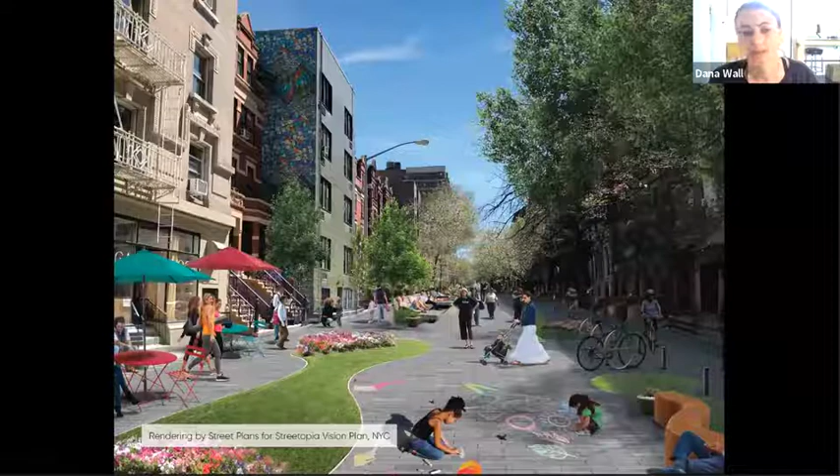So I like to start out just with a quick overview of tactical urbanism. As planners and designers, typically we'll take something like this and we will create on a computer something like this. But often the hard part is getting from something like this to this. And typically the capital process and city process is to basically jump from those designs to a permanent project. And the quick build methodology is all about breaking down that process into smaller, more temporary increments that you can then iterate upon and improve the design and improve the project until you arrive at the permanent project.

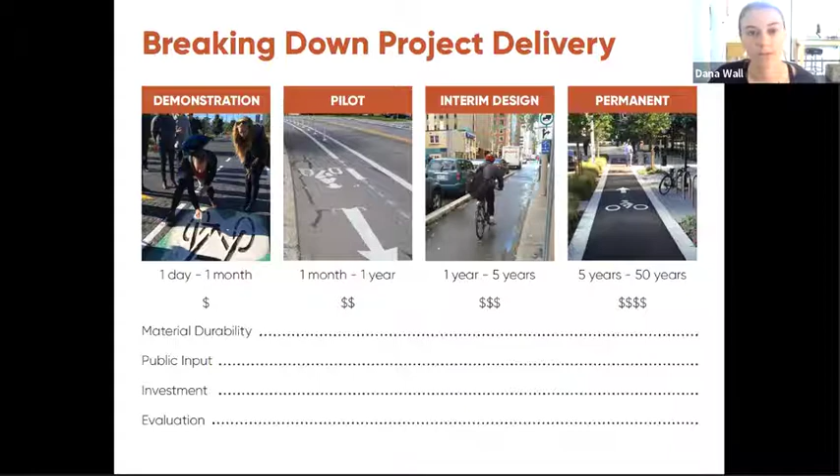So the goal is to have a permanent project that has already been tested, evaluated, and vetted before potentially millions of dollars are invested in that infrastructure. So the idea is that you build a project, you learn from it and evaluate, potentially make tweaks as necessary, and you just kind of continue that process until you get to the permanent version.

So this is the definition that we like to use for tactical urbanism, or the quick build methodology. It is an approach to neighborhood building that uses short-term, relatively low cost and scalable interventions to catalyze long-term change. And that's really the key piece that we're talking about here: how do we use it to get to those lasting impacts and potentially influence those permanent projects.

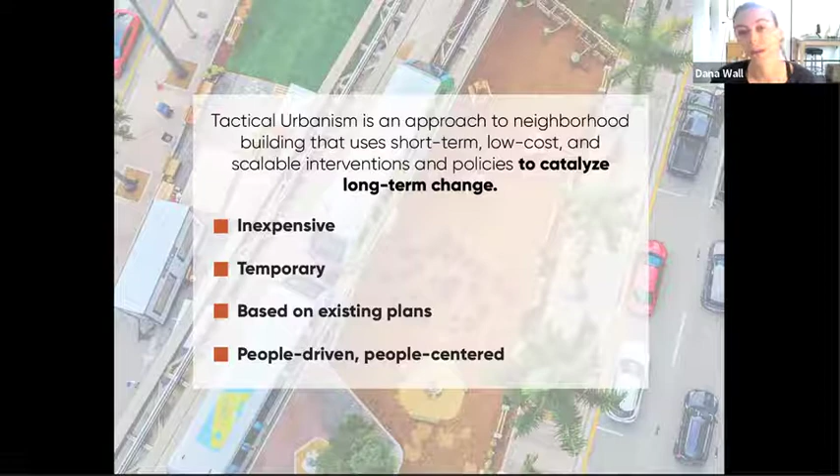So it is less expensive than capital projects. Tactical urbanism projects are temporary, although that can mean anything from a weekend to 3 to 5 years. Often they are based on existing plans and existing goals that cities have for active transportation. And then they are also people-driven and people-centered. So we use a lot of volunteers in our projects, and that is typically a part of the public engagement of our master planning projects.

So I'm going to go over 3 case studies of projects that we have done, and each one is going to have a little bit different of a takeaway in terms of lasting impact. And then I'm going to conclude with some key takeaways about how sometimes the lasting impact is not necessarily getting to that permanent project immediately, but there are plenty of other benefits and lasting impacts from doing these projects. So I'm going to share a couple of examples.

This first one is a project that we did in 2018 in Asheville, North Carolina. High level description is it was a 1-lane elimination project in each direction. The city was working on a redesign for this 1/3 of a mile corridor adjacent to downtown Asheville. And they wanted to add enhanced bicycle infrastructure and sidewalk extensions. And so we were hired, and we did several public workshops to go over the design alternatives. And what ended up being the project was sidewalk extensions, basically a shared mobility lane.

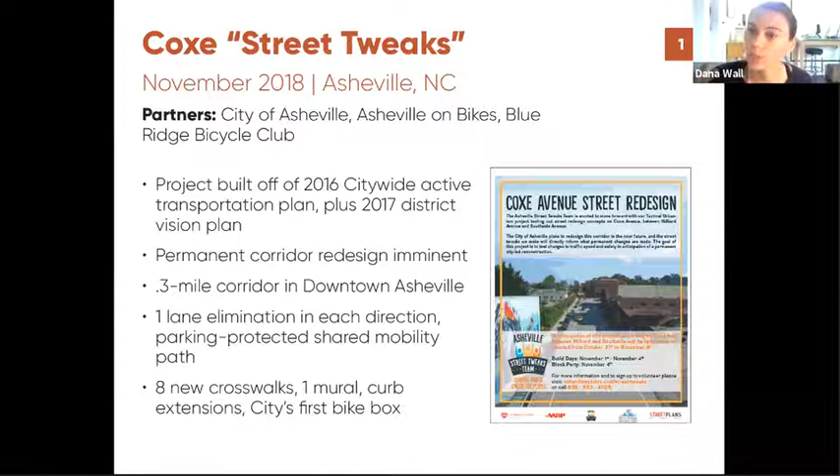So that was a sidewalk extension, which included a bike lane, as well as space for people to rollerblade, scooter, and walk. So these are just some sort of in-progress photos. The project did include a mural there in the center block of the corridor. The project also included 8 new crosswalks. We worked with the city to install all of the necessary signage and other things around those crosswalks.

We had 2 types of physical protection along the shared mobility lane, which included large planters, as well as these low-profile delineators. And this is what it looked like after. So you see here, this is the shared mobility part there, primarily the beige piece adjacent to the curb side. And we just basically popped out the on-street parking that was there. So we took a lane in each direction and really tightened up this roadway a bit.

This is just an image of the mural that we did in the middle of the street. We worked with a local artist. She actually designed it. And then we also worked with a local maker who helped us with the stencils. I think it ended up being over 20 different stencil pieces that we used to implement this mural. Just another couple of photos. Signage is always included. A couple of close-ups of one of the crosswalks there. And we also did a bike box; Asheville's first bike box was a part of this project.

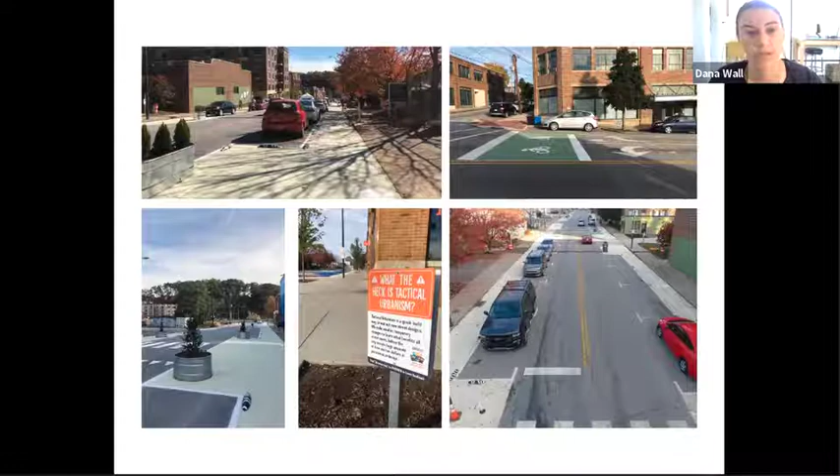So these are just some snippets from the final report for the project. A couple of the major successes and takeaways from the 6-month demonstration or pilot project was that it really reduced speeding. So the highest speed before the project was almost 90 miles per hour. That was kind of the absolute highest that a car had ever been recorded on that corridor. And then after the project, those high speeds were substantially reduced. And also very important, the car traffic throughput was unchanged. So the project itself did not cause any more congestion. The average daily traffic did not change.

And, of course, with reduced speeding, we also see lower risk of pedestrian fatality. That was also a very important takeaway. And then we also had a company do a more placemaking analysis. It's a little complex to go into in this presentation, but essentially, they concluded that the project made the corridor a little bit more pleasant for people to not only pass through, but reside on as well.

So about 2 years later, the center mural was removed. As you can see, the project has faded pretty substantially in 2 years. The city's design process for this corridor has been basically put on hold because of the pandemic. So there aren't any immediate actions that are going to be taken in terms of the permanent project. However, the project is taking on a new role helping to facilitate social distancing and outdoor dining and all of those interim changes that cities are making to accommodate safety during the pandemic.

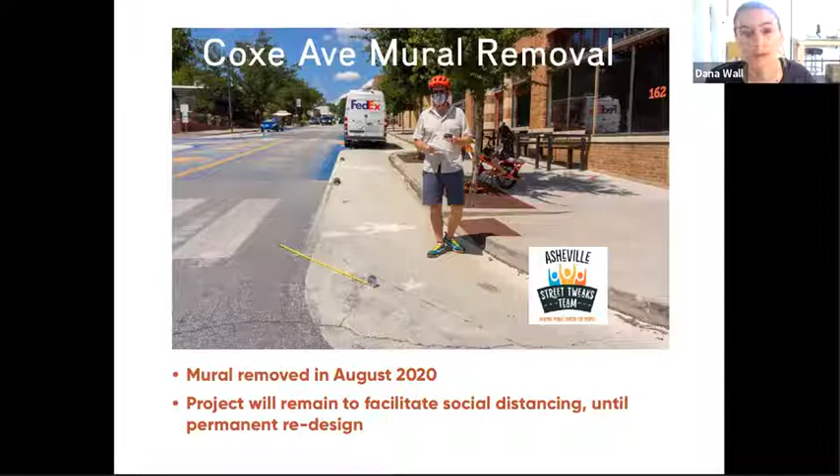Second case study is some of our work in Jersey City. So we both primed the bicycle master plan recently, and we also supported public engagement for the pedestrian enhancement plan. Both of these efforts were around 2018, 2019. And in both of these efforts, we were in charge of including temporary demonstration projects as a part of public engagement, and also to vet some of the initial proposals that we were making for the bikeway network and for intersection improvements for the pedestrian enhancement plan.

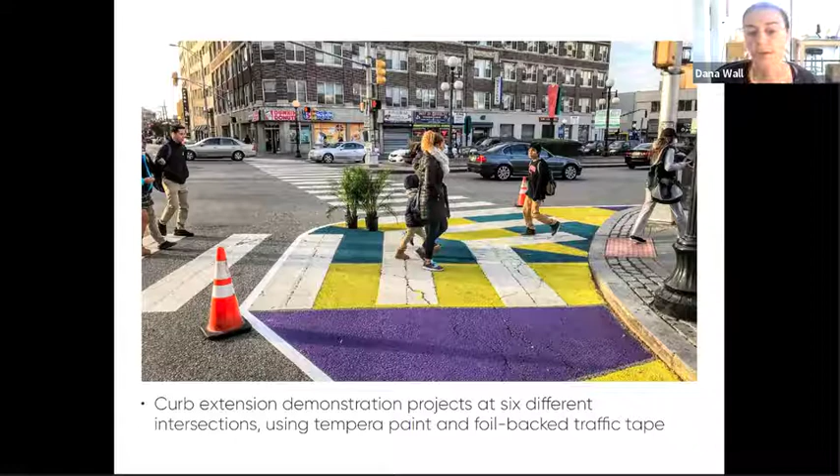So these are the demonstration projects. This is just one example. We did them at 6 intersections throughout Jersey City as a part of the public engagement for the pedestrian enhancement plan. They were exceptionally temporary, much more temporary than the first case study I went through, which was more of a 6-month pilot project evaluation period. These were made with tempera paint, so they pretty much washed away with the first rain. And we used very temporary foil-backed traffic tape for these as well.

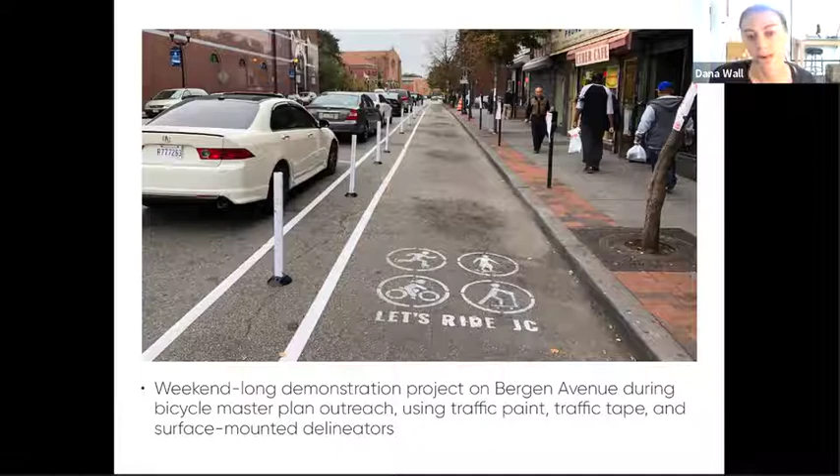And this was the demonstration project that we did that was a part of the bicycle master plan. This is on Bergen Avenue, so it's one of the corridors that we were really heavily looking at for the plan. And similar to the curb extensions, this was just done over a weekend. We used all very temporary materials to demonstrate this as a part of the public engagement.

And so Jersey City, we always say, is kind of like an all-star city in terms of taking things from temporary to permanent. They are an incredibly unique city in the sense that they really have taken the methodology and run with it. They have done some incredible implementation since our temporary projects and even before the final bicycle master plan was published. So, immediately following the pedestrian enhancement plan, they did implement 50 interim design curb extensions in the summer following the draft plan, including at the locations that were tested by the projects.

And then similarly, even before the bike master plan was published, they actually managed to implement 5 miles of interim design protected bike lanes. And they have retained us to continue to help them with the interim design and consulting services specifically for bicycle facilities that were proposed in the master plan.

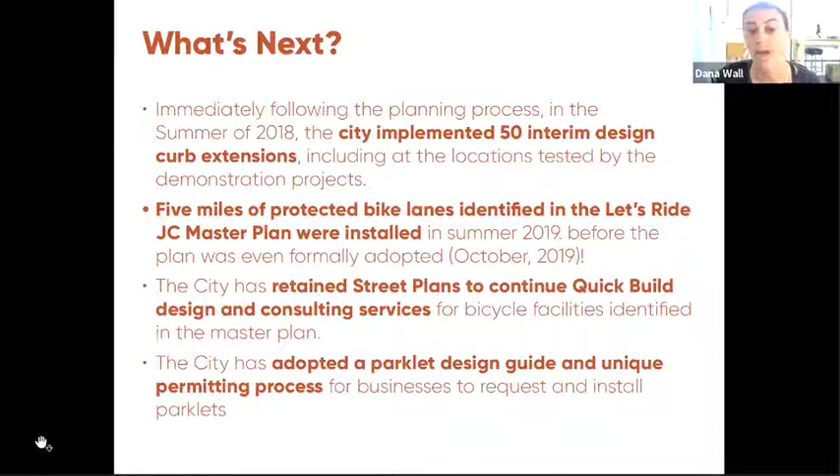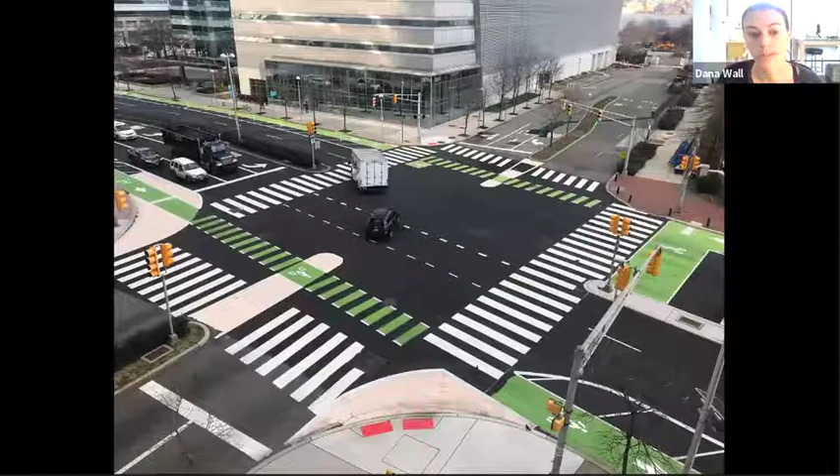So the final case study that I'll go over is the Go Ojai pilot project in Ojai, California. This is a more recent project that we did. It's actually still in the ground, so it's still being evaluated. Similar to the first case study, this is a lane reduction, one lane reduction in each direction to make space for parking protected and separated bicycle facilities, as well as curb extensions.

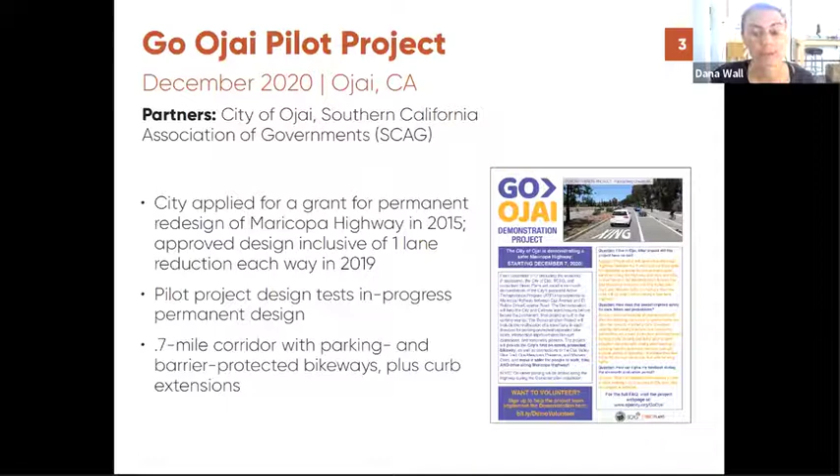So the city had been working on this corridor for a long time, basically since 2015, and they decided that one of the ways to help them arrive at the permanent design would be to do something on a temporary basis. So we were hired to do a 6-month temporary project along this roughly 3/4 of a mile corridor. And something interesting to note about this corridor is that it is actually a highway. So if anyone has any questions about doing pilot projects on highways, feel free to let me know.

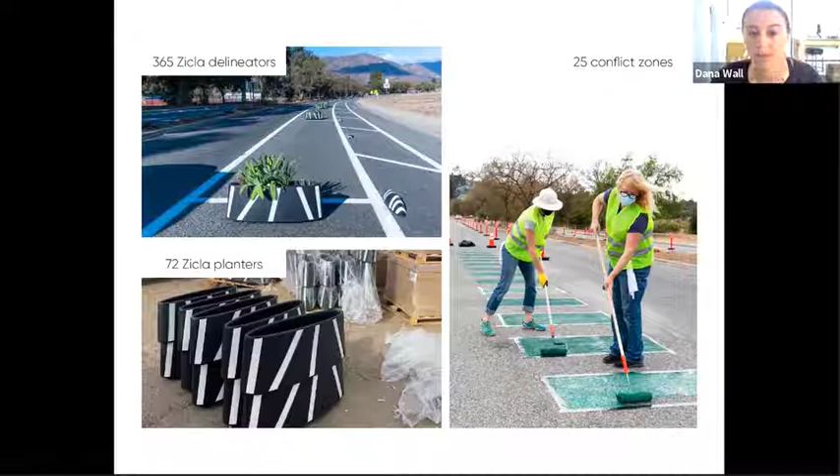It's a little bit more complex of a permitting process, but these are just some images of what the final project looked like. We again used some of those low profile delineators from Zicla. We also tried out one of their newer products. Zicla is a Spanish manufacturer, by the way, and we use a lot of their products in our quick build projects. So we also used planters. And then of course we had volunteers help us with some aspects of the build. We actually had to use contractors this time to comply with Caltrans permitting, but we were still able to integrate volunteers into the process.

We have had issues with planters being hit, as well as some minimal compliance with some of the other aspects of the project. But a really big win from this project is that the city is actually going to be extending it to overlap with full in-person session for school again, and just to continue to get some more evaluation and have the community get a little bit more used to it.

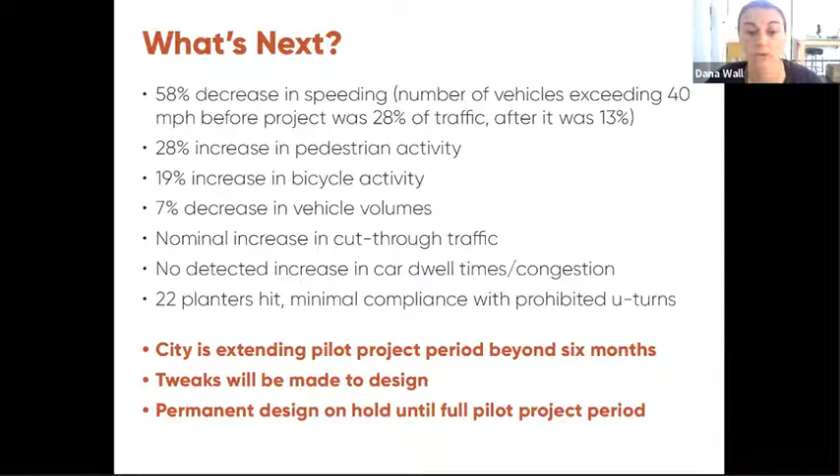So a couple of key takeaways from these case studies: like I said, tactical urbanism and the quick build methodology is meant to do a variety of things, get projects in the ground faster than the normal capital process, expand public engagement, but ultimately you're trying to reach a permanent project. You're trying to reach something that could be in the ground permanently after having been evaluated and implemented for a lower cost.

However, a lot of our projects, cities leave them in the ground, and they can actually last 3 to 5 years and beyond, as long as they're being regularly maintained. And for some cities that is actually still more cost effective than pouring concrete and using more permanent materials. So, at least in our experience, permanent does not necessarily have to mean pouring concrete. You can have some of these projects last a good while and still get benefits from them.

Also, lasting impacts of tactical urbanism or quick build that we don't always think about are not only about the infrastructure. A couple of our projects, and case studies that we know of, have resulted in cities taking a look at their internal permitting processes. They've taken a look at their staff, for example. Can we make a designated staff team just for quick build projects? How can we streamline our permitting to allow for more temporary materials and an accelerated implementation?

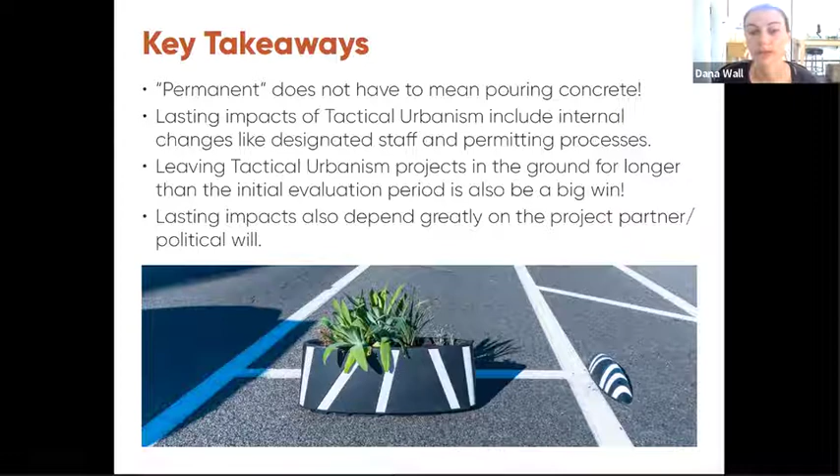So those are typically the areas where we see the most success, the readiness of these cities to really take on this methodology and run with it. And that will really determine the magnitude of lasting impact in a lot of cases.

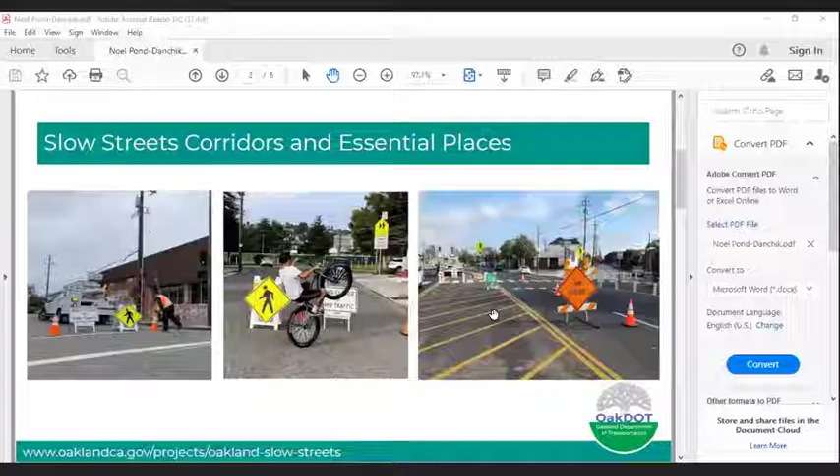I'm going to be talking about one example of our quick build projects and how we're moving forward with it now in response to COVID-19.

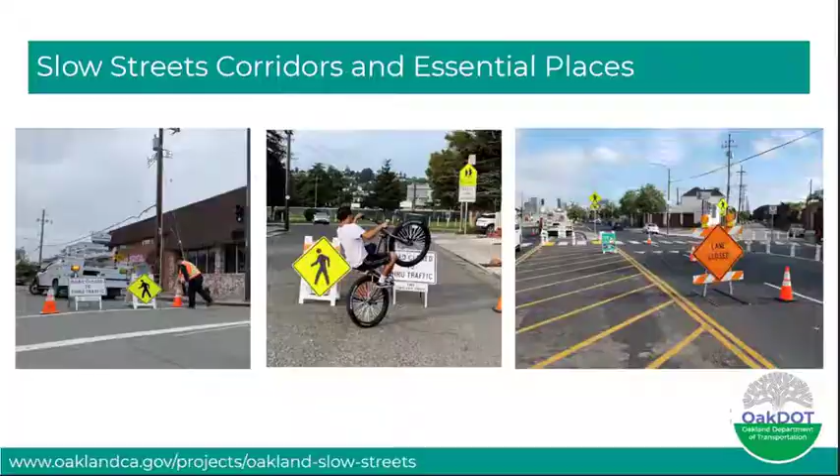So hearing this, we came up with Slow Streets Essential Places, which are a mix of permanent and temporary traffic safety improvements, things like signage, daylighting, pedestrian refuges, bulb outs, or setting pedestrian signals to recall to enable safer access for residents to essential services, which we defined as grocery stores, food distribution sites and public facilities, or COVID-19 testing sites that overlaid with our high injury network, where we see the most injuries, and prioritized these locations based off of our geographic equity toolbox, which uses some indicators like race and income.

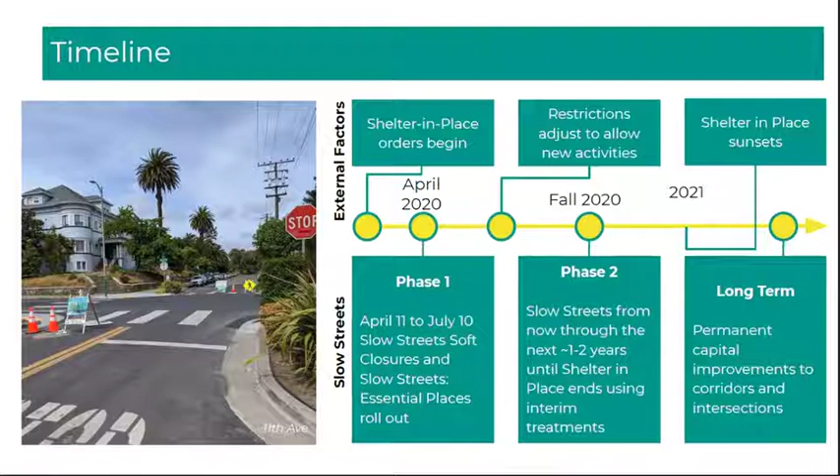So here's a quick overview of our timeline. So right now we're in what we're calling phase 2. We stopped rolling out new slow streets and we're evaluating the program corridor by corridor and making some changes that will last until the end of shelter in place. And to be honest, we're still kind of figuring out what happens after that. Next slide.

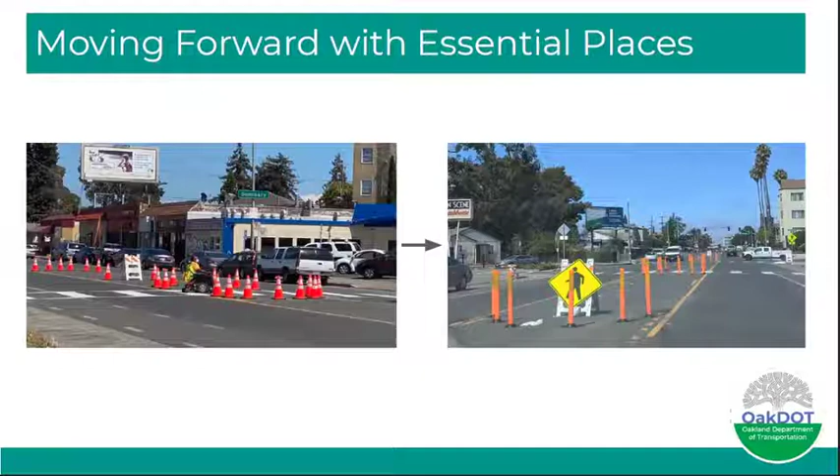So the essential places aspect of slow streets has actually been a lot easier for us to transition. And in fact, at some point, we started installing them just straight away using flex posts like you see on the right, rather than cones, because the cones were just getting knocked over or destroyed so quickly. And we're in the middle of applying for some grants to upgrade a lot of these treatments to concrete as well. Next slide.

Moving forward with the slow streets corridors is a bit more involved. Like I said, we've heard more different feedback on the program. It's been very successful in our whiter and higher income neighborhoods where a lot of folks are telecommuting, and we got a lot of support from these neighborhoods from our early engagement. But we've gotten less engagement and more mixed feedback from our corridors in what we call our high priority neighborhoods with higher concentrations of BIPOC and low income folks, and on busier streets, corridors that have higher traffic volumes.

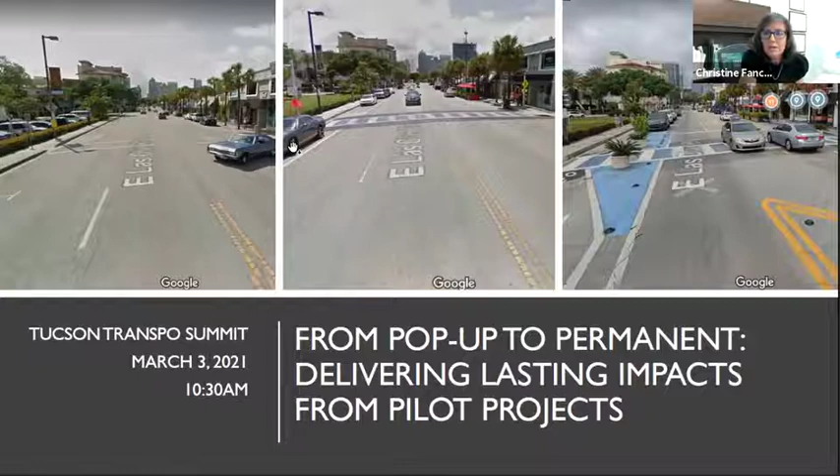And so the city worked in 2017 with the businesses to put a temporary project into the ground. It was done relatively quickly, probably within 6 months, with a lot of community engagement. And you can see a protected bike lane was created using planters, paint, delineators. We had a lot of education that was either spray painted on the road, or signs on delineators telling people where to bike, where to park. So a lot of education. An evaluation was done, and that was presented to the board as well.

Oops, can you go back? Sorry.

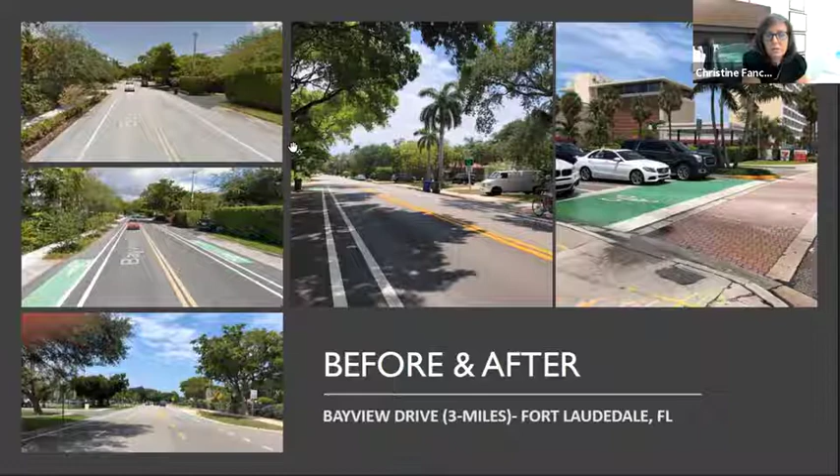The next one is within Victoria Park, which is a historic neighborhood right close to downtown in Fort Lauderdale. The neighborhood did not have a place to bike or walk on this corridor, and it connected basically the heart of the neighborhood to downtown shopping, dining, and work. And so we were able to, basically, remove that white stripe on each side. I don't know if you can see my cursor, but there's a white stripe that we removed, and we just moved it basically 1.5 feet in and did 10-foot lanes and created the 4-foot bike lane.

And people are using it more as like a multi-use path. But the only cost was removal of those white stripes, and then we refreshed the double yellow, the new white stripes, and then the green mats. And so it was a really low-cost, very quick creation of a bike-walk area.

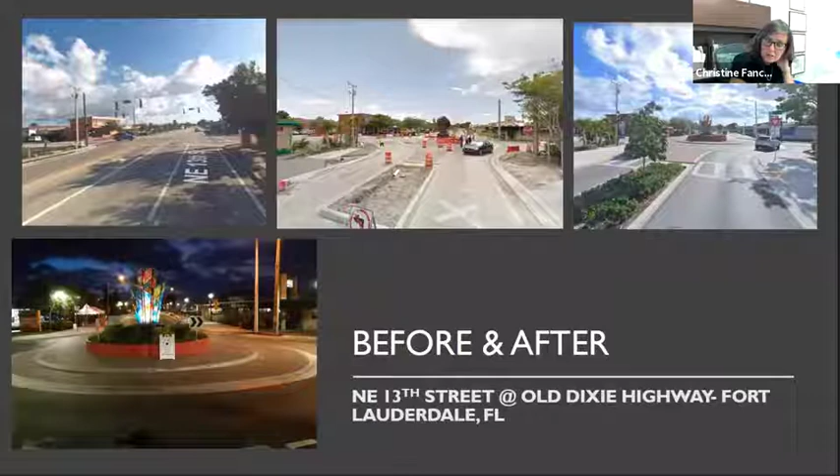And then if you'll flip to the next slide, at the intersection we were able to remove a signal and then put in a roundabout, which created a lot of traffic calming for this neighborhood.

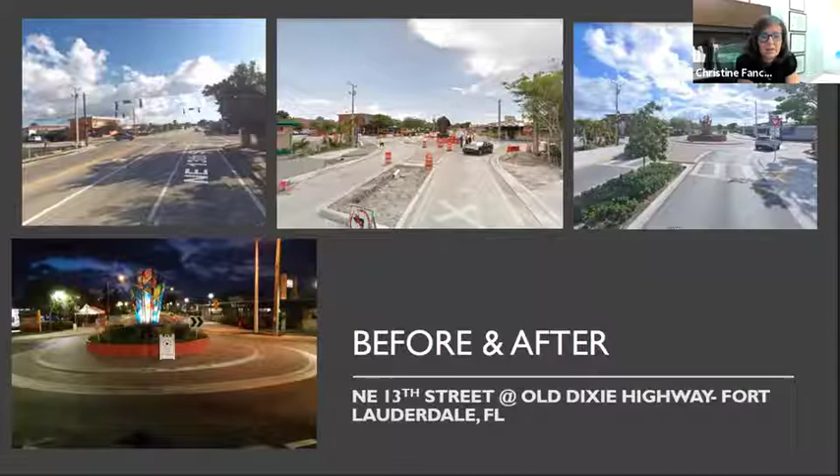And the community came together and got a grant for the art piece that was put in the middle, and it was built by the community. And you can see that bottom picture is a little bit of education that says traffic does not stop in roundabout, because this was the first roundabout on a non-local. And we have a lot of roundabouts in neighborhoods, but not in a commercial area. And so we had a little bit of education phase on this. So by and by, this has been an extremely successful project that has redeveloped basically every business within the corridor and brought the community to life.

The next project, Old Dixie Highway, actually stems off that roundabout that I just showed you. And this one really built on the existing, and maybe it wasn't temporary, but it just really built on what was there before and added value to the community. Unfortunately, the reason for the project was we had 2 bicyclists that were fatally killed riding on Dixie Highway. And so the project came together and created continuous bike lanes and sidewalks on both sides, had a lot of traffic calming on this roadway.

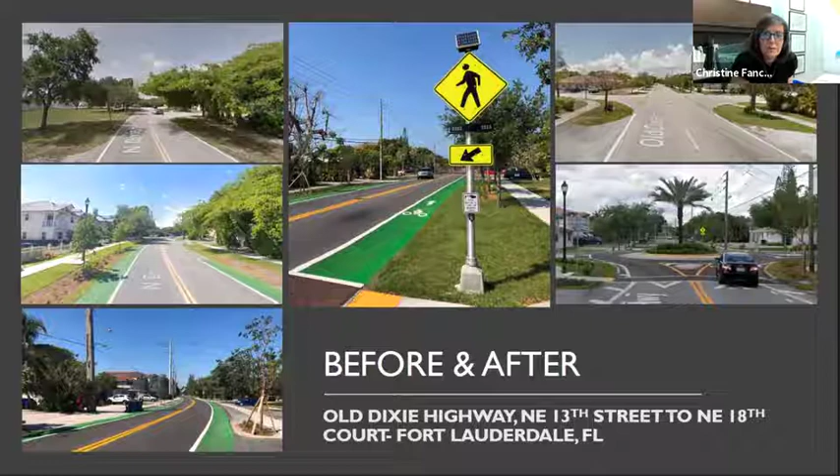Every crosswalk was raised. And then we added a roundabout at the north end. So you've got roundabouts kind of at each end of this project connecting to the 13th Street project. So this project has become kind of a model for every other neighborhood in Fort Lauderdale wanting something like this to create safety and value in their neighborhood.

4th Avenue is a great example of using paint basically to redelineate on a state highway. Definitely wanted to highlight this project. It might not be as gorgeous as the other ones, but we basically were working with the state. The local MPO had planned for this to be a bike corridor. And I had recently started at the city, and the state was planning to bump out the curbs and take away the landscape buffer and the trees to add the bike lanes.

And the traffic volumes were only around 16,000 vehicles. Of course, they were forecasting it would go to 28,000. That's why they needed the 4 lanes. But we basically had that discussion about the real traffic volumes and was there a possibility. And they had just adopted the statewide lane elimination guidance. And we were able to basically walk through that process. The city did the traffic engineering and the public outreach and received resolutions from both the city of Fort Lauderdale and the city of Wilton Manors to the north.

Sorry, can you go back one? Sorry.

And work through that state process to be able to get the lane elimination approved from the central office in Florida. And then once we had that typical section, we were able to move into design, and the state took over from there once they had approved design. So this went from 4 12-foot lanes to 3 11-foot lanes, 6-foot buffer, and a 6-foot bike lane. There's 3 schools on this corridor, and it's been a huge asset. I've had people that weren't very much in favor of this project that have come back and said it really works beautifully, and it's really a pleasure to be on this corridor now, as it wasn't before.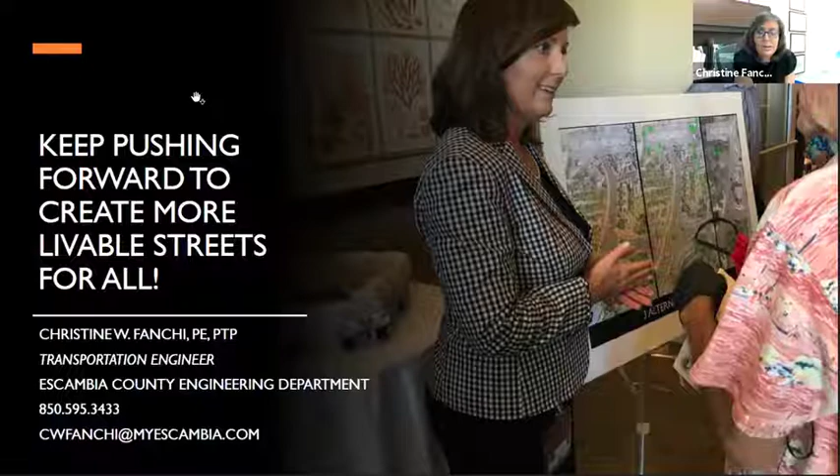So I look forward to the questions so that we can work together to create these opportunities. Thank you.

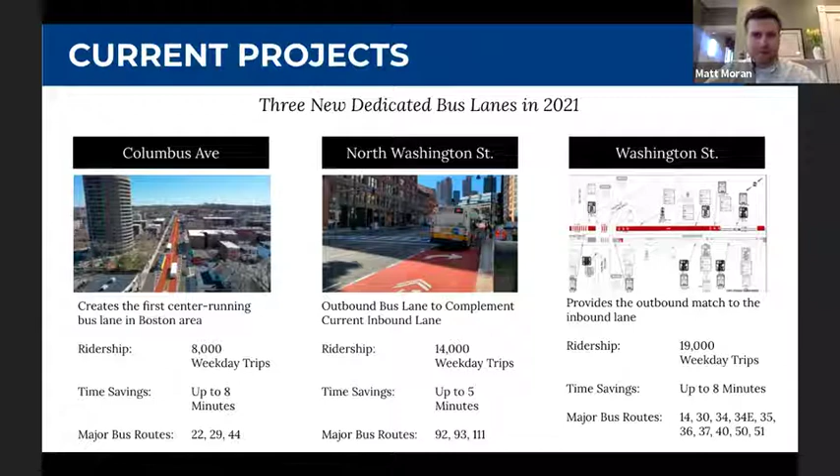I'm going to talk a little bit about the original Roslindale bus lane right now. So this is when we piloted a project, and I think it turned out pretty well. Going back to 2017 and into early 2018, the Washington Street corridor in Roslindale is a one-mile corridor going from Roslindale Village, which is a big residential commercial neighborhood, to the end of a rapid transit line, the Orange Line.

There are nine bus routes that use this corridor, and on a typical day, there could be up to 30 minutes of delay between those two points at the worst period of morning congestion. There were about 18,000 MBTA bus riders on this corridor every day, plus Boston Public School buses that use this corridor.

So why pilot here? So we had strong community support, first and foremost, to do something like this. The community was very interested in improving their trip time to get, obviously, to the rapid transit connection, to get to the end of the Orange Line. And this was particularly interesting because the bus lane would have actually taken away parking between the hours of 5 a.m. and 9 a.m. on the street. And so we really wanted to understand, what's the support here? What's the community think? Let's look at this in terms of a pilot.

Also, there weren't any other recent bus lane projects in Boston that we could point to and say, yeah, here are the technical specifications that we should be thinking about when we look at a permanent build. The last bus lane project was in 2002. So we really need to understand the operational challenges and, again, the community challenges of implementing something like this.

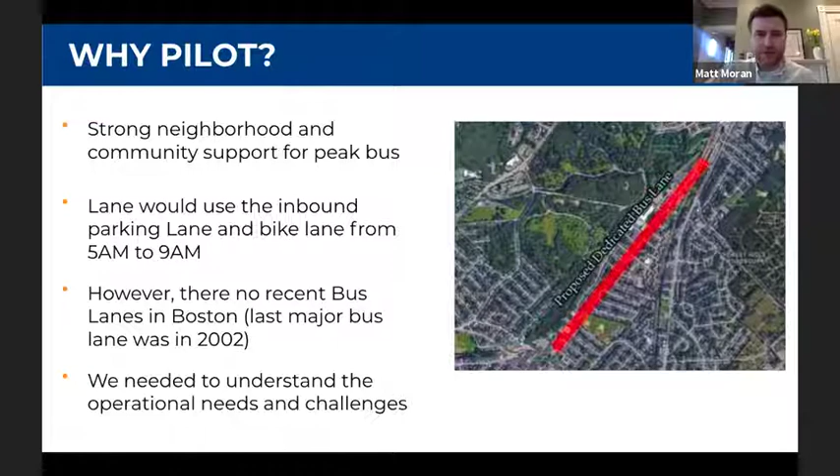So what was this pilot? It was 1 month in early 2018. We used cones, VMS signs, and temporary no parking signs. We had enforcement support from Boston Police and MBTA Police. And we did extensive neighborhood outreach ahead of time. It was actually really telling that my colleague who was a project manager on this said there were no vehicles that were towed on the first day of operations, which I think is a testament to the extensive amount of community outreach that went in ahead of time.

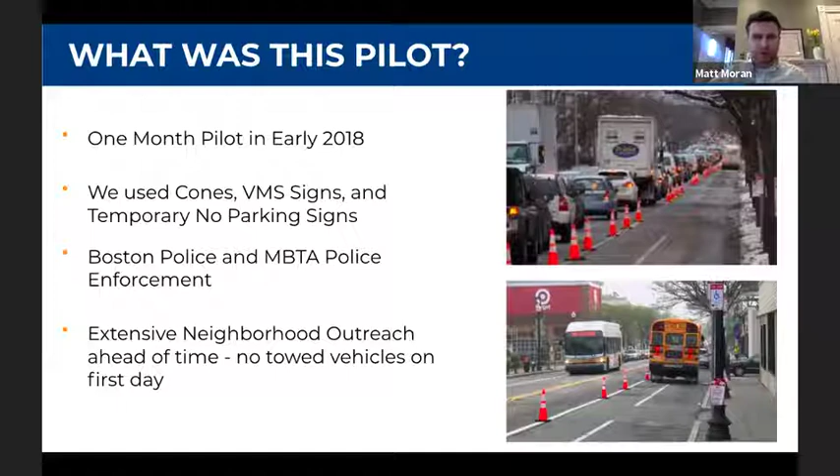And what were the results of the pilot? So your typical AM peak bus saves about 25% of its trip, or about 6 minutes. Some days it got up to 30 minutes, but typically it wasn't quite that long. Bus reliability and predictability improved significantly over the course of that 1 month.

We also did surveys. So we heard from bus riders who obviously were very supportive of this. And interestingly, bike riders were supportive of this as well. You might think that buses and bikes sharing a lane is necessarily going to bring some conflicts up, but I think bike riders appreciated having a wider lane and not having as many chances of doorings and other issues with that condition.

And what did this do? It led to a permanent implementation of the Roslindale bus lane in the summer of 2018. So quick evaluation, we saw that AM peak ridership grew by about 5% during this time, so that's about 160 extra riders. And it's been successful enough that we are now implementing an outbound PM peak bus lane in collaboration with the MBTA and the community.

So really quickly, we're going to skip the pilot. And this is the story of Brighton Ave. So Brighton Ave is in a neighborhood called Allston. It's a very dense residential commercial neighborhood, sort of wedged between two big universities, Harvard and Boston University. And this corridor used to be served by a trolley line that was discontinued in the 1960s. So there's still actually some neighborhood memory of that really good transit connection that went through here.

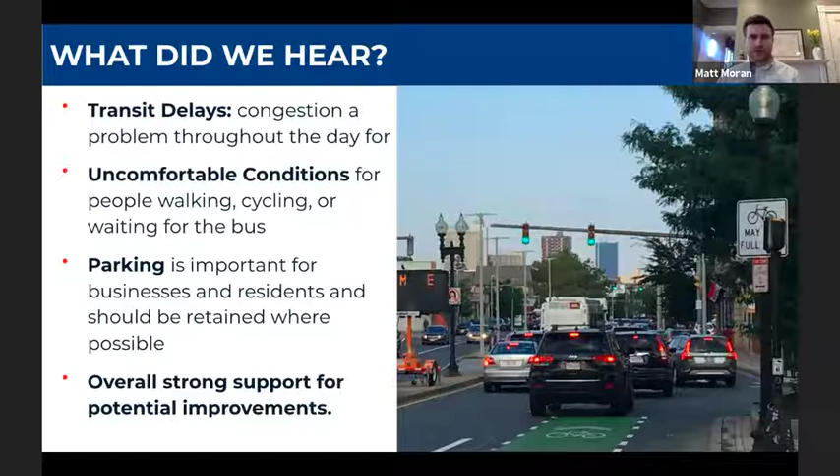So again, working closely with the community, we decided to skip the pilot and go straight to implementation. We looked at two concepts. One was a peak period bus lane that used the right travel lane, and then one was just having an all-day bus lane. We checked in with the community before moving ahead, and we decided to move ahead with an all-day bus lane, given that perception that congestion was an issue all day long, not just during the peak periods.

And so what was the result of this? Travel time on Brighton Ave decreased by about 4 minutes, where there was 7 to 8 minutes of delay. Ridership went up by 8 to 9% over pre-bus lane levels. Interestingly also, traffic counts decreased by about 13% after the bus lane went into effect. And so we think this was some level of people maybe diverting from Ubers and Lyfts and getting into buses because they were now more reliable, as well as people probably seeking alternative corridors.

One thing that's been a challenge on Brighton Ave has been enforcement. Having a bus lane and bike lane right next to parking has led to instances where people double park, and has led to confusion from some drivers about how to use the facility. So this is something that we're still working on in terms of education, signage, and trying to implement some of these into our future projects.